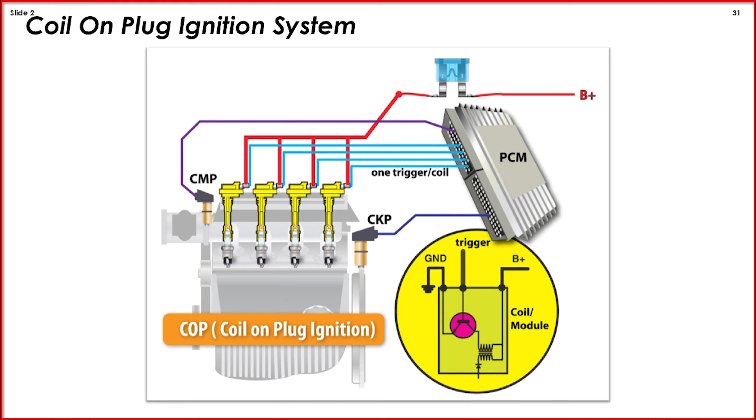So I've got some different ignition coils on the bench here, and I've actually got a few cutaway components here. I've got primary and secondary windings here. As we look at them on the screen, let's take a look at what's going on. The main components are the primary and secondary windings, which are wrapped around an iron core. Now the primary winding is much thicker than the secondary, but there's a lot less loops of wire here.

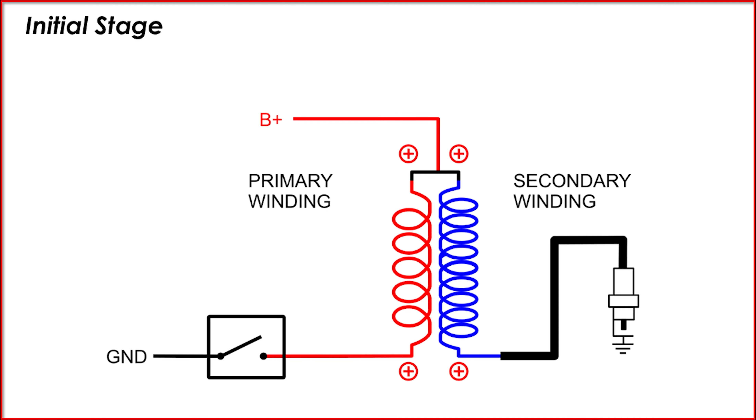So now a switched external circuit is used to supply current flow through this. We see on the lower left there, we've got our made up circuit here, and we've got that ground, and you can see right now it's not providing a path to ground. So once that is closed, now the primary is going to turn on, and we're going to see a magnetic field generated around the winding. As this magnetic field expands, a counter voltage will be created into the primary, and that's going to oppose the flow of the current.

This expanding magnetic field is also going to generate a voltage into the secondary winding. Because of all the additional loops here - if we look at my samples on the bench, we've got the primary, this heavier wire, and a much finer wire here on the secondary with significantly more windings - that's going to significantly amplify this here.

Right now, again, I ask you to pay special attention to the polarities here. In the primary, we've got positive on the top, negative on the bottom, and the secondary is opposite of that. So now the trigger, or the control portion, or the driver, is going to turn off, and now we create spark. You notice how those polarities have reversed themselves at this point. Now this magnetic field is collapsing upon itself, and it's sending all the current out to the spark plug to ionize or jump across the gap there. So that's when spark is created.

Now keep in mind, different conditions are going to require different types of spark demand. So when a vehicle's sitting in the bay, like the car is sitting here right now, imagine if it's idling - it's not going to take a whole lot of work here. We've got low in-cylinder pressures at that point, we've probably got a good air-fuel mixture now. Keep in mind, the fuel atoms are going to help jump the gap there, help that spark travel. It's going to create a path of connectivity there.

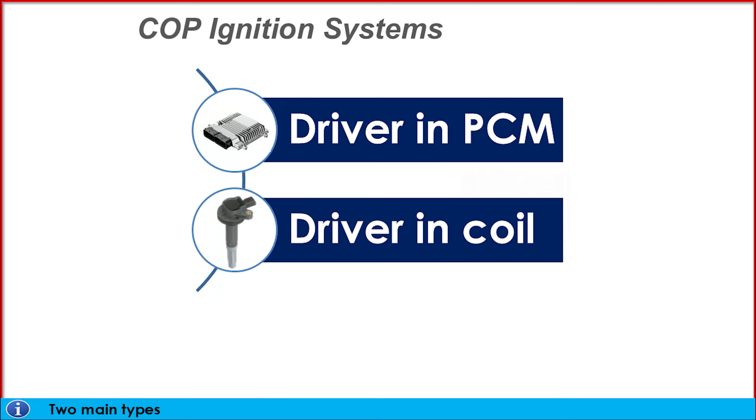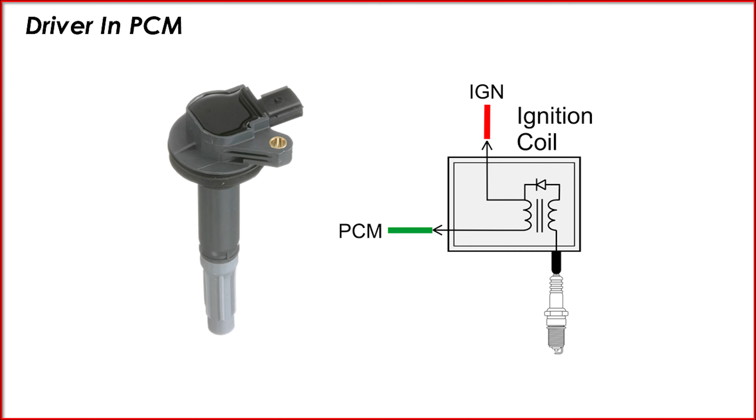So on probably one of the most popular selling ignition coils, let's say the Ford 2-wire ignition coil, even this Chrysler here, we've got a 2-wire ignition coil. And so you can see kind of the typical schematic shown on the screen here, where we've got B+ ignition power being fed to the primary side of the ignition coil. And then the PCM is going to command the ground side of it there. So that's where the actual driving of this circuit is going to occur. The switching, if you will, occurs inside the PCM. So we can see our primary circuit, and then we can see our secondary circuit connected directly to the spark plug itself.

So this is fine and dandy until either the driver goes bad or the coil shorts out. And in that case, the driver is going to go bad. So maybe you've run into this. I've personally run into this many times in the shop. I even run into it with my own kid's car, a Ford Fusion, where a faulty ignition coil took out the driver in the PCM.

And so that's one of these tips here is if you run into this situation, we don't want somebody to just go, oh, it's got a bad coil, put in a new coil. Well, if you got a faulty driver, great chance of damaging that new coil. So you always need to stop and verify the control signal before installing the new coil. A lot of people like to just, well, let me swap cylinders 2 and 3 around. Well, you may just kill that particular one as well. So always stop and verify that the signals are what they need to be.

Once you've come to the diagnostic conclusion, like in my scenario, we've got a faulty PCM now because of, what came first, the chicken or the egg? Is it the coil killed the driver in the PCM or the PCM killed the coil? Regardless, in that situation, in my world, it gets 6 new ignition coils and a new PCM.

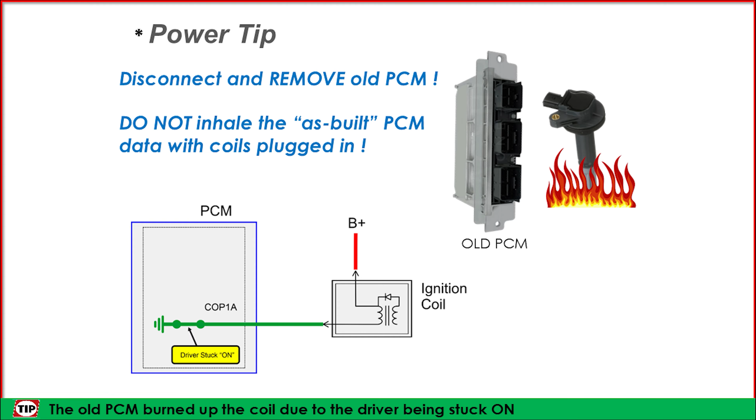And so that's where there's that little tip here as well. You want to make sure that you don't have coils plugged in when you're going to exhale and inhale the PCM information or that as-built information on a Ford when you're programming that new PCM. If you plug it in, the new PCM, and you still have the shorted coils installed on the vehicle, you're going to burn out that new PCM again. So either have your new coils installed or go ahead and unplug them all when you do this process here.

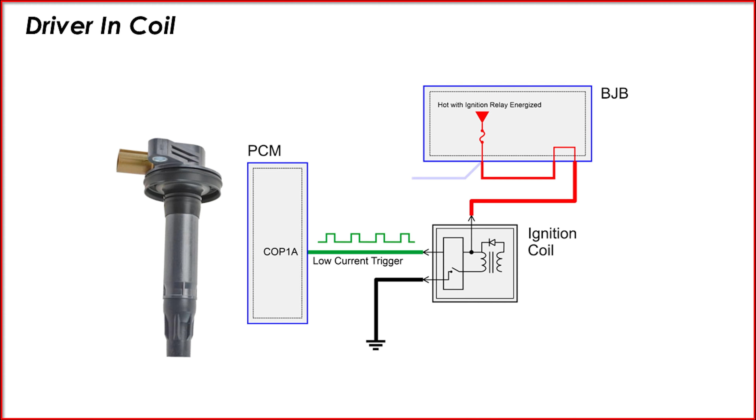Then you'll notice it's got a dedicated ground. That's going to be the 3rd wire there. But then the middle wire will be our trigger wire coming from the PCM. And so the PCM, unlike where it was on the other ones where it's actually physically making the connection there and providing the ground, this one is simply sending a square wave trigger signal there, telling, if you will, the ignition module inside of that coil to turn on and do the work. So if you think back to the old distributor days where we had an ignition module, or even DIS days where we had a separate ignition module, think about now that module being inside of each ignition coil here. And so we've just got a trigger signal coming to it from the PCM itself.

And then it's going to turn on and do the work there.

If you're working on a Toyota, that might be a little different, with a command and feedback signal. I don't want to say they're all 4-wire like this, but we always recommend doing your research and looking at a wiring schematic. But you should get a good understanding or appreciation for the differentiation between the two types.

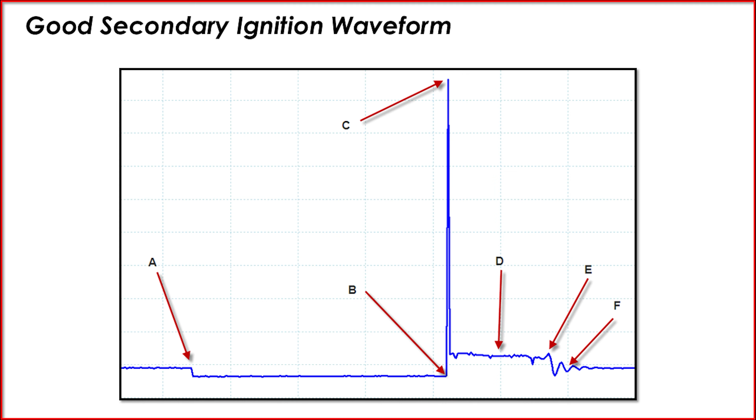Now when we get to point D, that's our spark line - this is what's happening inside the cylinder as it jumps from one electrode to the other. This is actually a pretty good one, tapering down a little bit as it's burning off the fuel mixture in there. We get a little tail at the end when it turns off at E, and then we can see the coil oscillations as it begins to recharge itself and prepare to happen all over again.

That was great in the days when we had accessible secondary ignition - we could clamp onto a spark plug wire right at the distributor cap. But with coil-on-plug we really don't have that same access. Or do we? Everything that happens in the secondary happens in the primary.

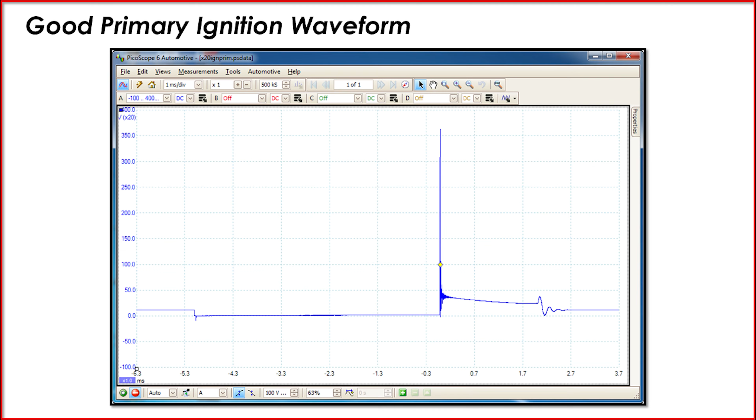In this example we're using a lab scope and back probing a coil-on-plug, looking at the primary side. You can see the exact same thing occurring as what we saw looking at the secondary previously - the primary gets turned on, gets turned off, you can see the peak voltage, and then the spark line in cylinder as it tapers down, burning off that air fuel mixture. It puts itself out, and we can see the coil oscillations as it starts the circuit all over again.

We can also look at current. Using our low amp current probe, we can put this over the primary feed to each individual coil. I'm going to show you a different trick I learned years ago to make a complete ignition system diagnosis more efficient, where we watch all of them here.

If we take a look at this, we can notice that when the coil primary is turned on, the current starts going up. We can see that nice smooth ramp, some oscillations at the beginning, and now it's going to build - going up to about 8.5 amps is what it's pulling there.

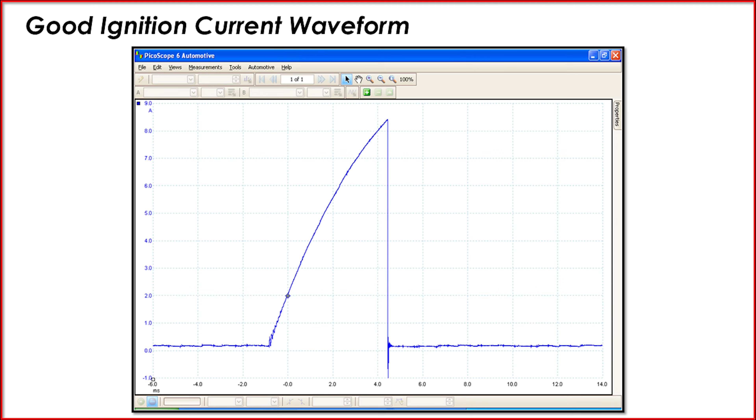And then it's going to have a nice clean turnoff, and you notice the tails or the oscillations there at that shutoff. So this is an example of a good ignition coil.

Now, if we've got a faulty ignition coil, take a look at this one here. That turn on, we don't really get that ramp. It goes vertical there, and that's usually due to some sort of an internal short or bypassing some of the primary windings there.

So we've got a problem with this particular ignition coil. And again, it's where it turns on there. And then we've got kind of the rest of the ramp looks pretty decent. Now, obviously this isn't drawing as much amperage as we had previously, so it's about 1 amp less here, or 2 amps less.

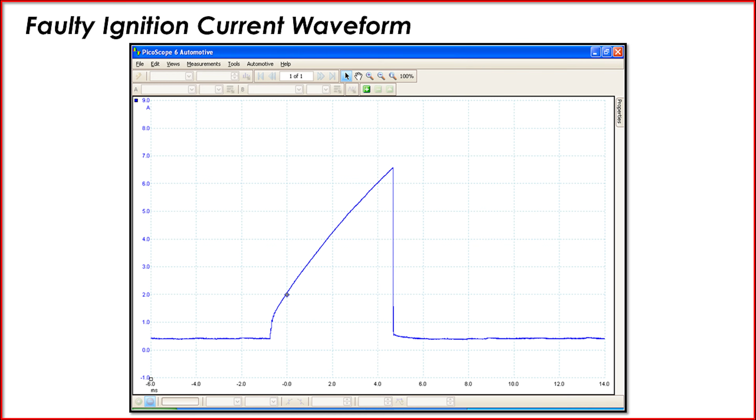And then notice the turnoff. It doesn't sharply turn off. It kind of tails off at the end there. So again, this is indicative of a faulty ignition coil current pattern. So hopefully after that little bit of review, let's actually go to the car here.

I'm going to fire it up. I've got the scan tool hooked up. We're going to see what's available on scan data on this particular vehicle, because some vehicles we do get a primary spark output data PID or a spark duration data PID.

We can get some information. I've got the information pulled up on this car. Let's take a look at this together. And then I've got the lab scope set up here behind me. So we're going to look at the primary circuit, and we're also going to look at the ignition current. I've also got a little paddle probe there, which some technicians really appreciate. I haven't spent a whole lot of time with it, but it's a tool nonetheless. So let's jump into this a minute.

All right, well, let's get the car started here a minute. Kind of reach in, get it fired up.

So we can take a look at, as I mentioned, there wasn't a ton of beneficial data. Obviously we're using engine speed for reference here. It shows us knock retard, shows what our base spark is here, and where our spark advance is. So I'm not getting a ton of diagnostic data out of this at the moment.

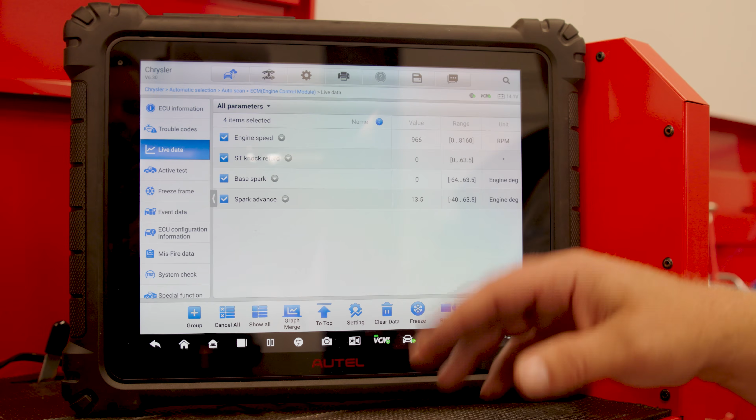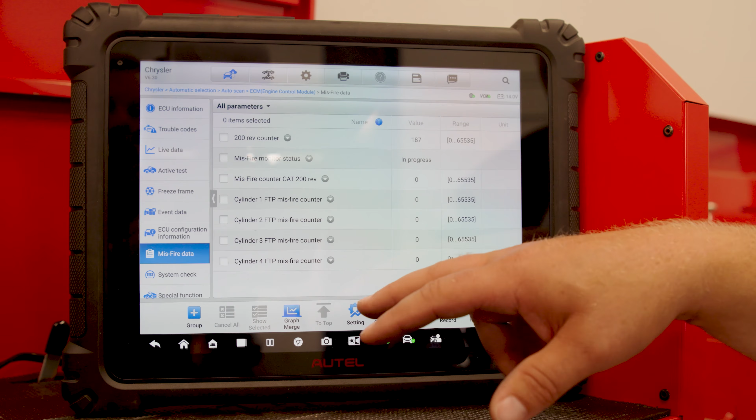And so, this isn't great, but like I said, it's worth looking at. I can click down here, pull up misfire data, and probably pull up some additional data PIDs here, but this is mostly related to the misfire itself. Doesn't give me a whole lot of specific ignition information at this point.

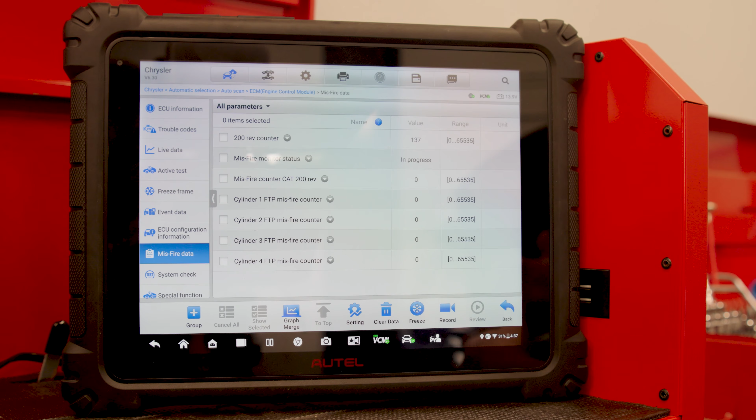So it's always worth looking at. You're going to be in the driver's seat, you'll have it plugged in. It's quick and easy. But let's go now under the hood and do a couple additional tests.

All right, so let's go turn around over to the car here. And let's do a little bit of actual physical testing here. So yes, I've gone ahead and loosened up the bolt in preparation for this. And I'm going to pull out number 1 coil here.

Yeah, so now we've got a misfire in the vehicle. We can hear spark occurring, but we've got good output from that coil. And so I feel like this is a good output coil.

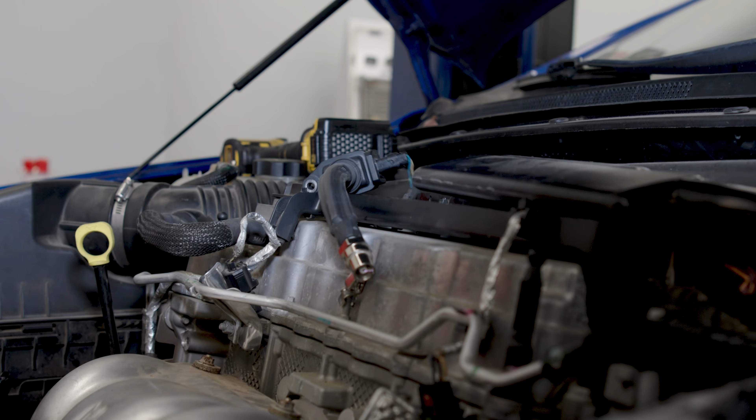All right, so you've seen the spark tester in action here. We feel like we've got a good performing, good output from this ignition coil. So now I'm going to put it back together. I'm going to slide it back in.

But before I do that, I'm going to take channel A of my lab scope, and I'm going to back probe the feed circuit here. So we're going to be scoping the primary. So let me reinstall this here, make sure I've got the bolt put in place properly. Okay, so I've got that in there, set that off to the side.

All right, Corey, we can go ahead and start the car, please.

So right now we can already see my ignition primary signal occurring here. And again, without zooming in too closely on it right now, we can see the primary turn on, we can see the peak voltage, we can see the in cylinder occurring here, and we can see the turn off oscillations. I can zoom in, I can look at it in significantly more detail there.

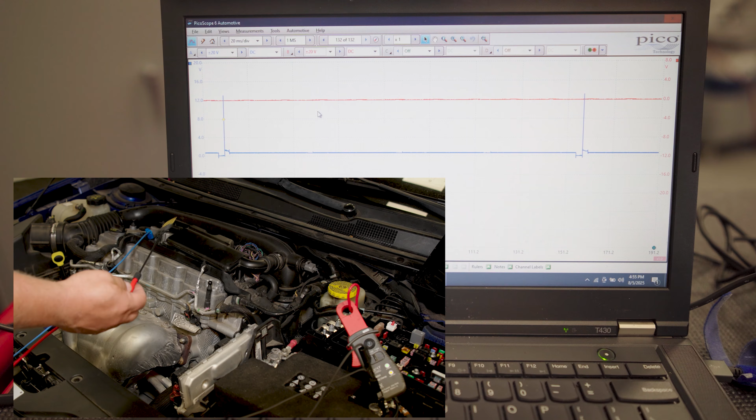But I've also got on channel B, the red channel here, this little paddle probe. And this is something a lot of technicians use. I don't have a ton of experience with it, but you can see right on here, it says this side to coil. So I'm simply going to lay it on top of the ignition coil. And so we can see on channel B that I've got something going on there. So let me turn off channel A.

So we're only looking at channel B. And we've got a signal. I move over to number 2 cylinder. I can sneak over to number 3. Some of these are difficult to get at, and that's kind of the beauty of this. I'm not going to be doing any analyzing off the signal. There's probably people way smarter than me that can do that. Right now, though, I kind of like it because it's telling me that there's some sort of a signal going on there, and it's somewhat beneficial.

I still prefer to actually see my ignition primary signal there. So I'm going to turn channel A back on as it was. Let me turn off channel B. Now I'm going to turn on channel C.

If we look over here, we can see that I've already done some research, and we recognize that all the ignition coils are fed off of fuse 15. So by removing that fuse and installing this jumper lead, now this one actually has a spot where I can install my fuse again. So I've got my 20 amp fuse in there, and now I'm monitoring the current with my current probe here. As we look at the pattern on the scope screen, we can see this being synced to number 1. I now know that this is number 1 current from that ignition coil.

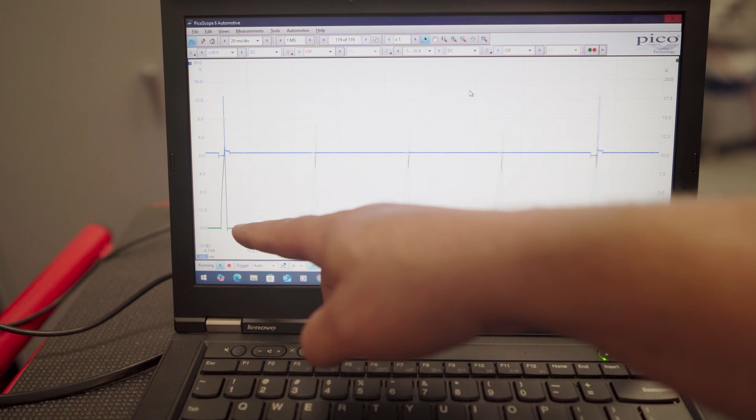Now if we apply the firing order and assume it's 1-3-4-2, we can identify each individual coil. I've really appreciated this on some older vehicles, like an old V10, where I didn't have good misfire information. By syncing to number 1 cylinder and applying the firing order, I've got enough time on my screen here - I'm at 20 milliseconds per division. We could zoom out, we could zoom in, but I've got one complete rotation, going through all 4 cylinders and repeating itself here again. Now I've got a good understanding of the complete ignition system, and I can move, if I suspect a coil, directly to that primary circuit.

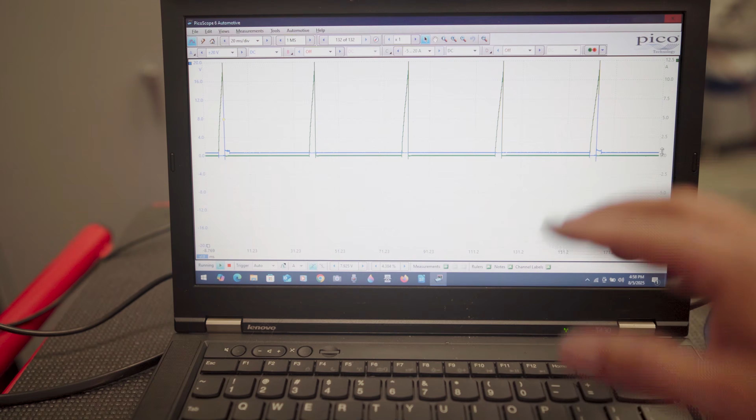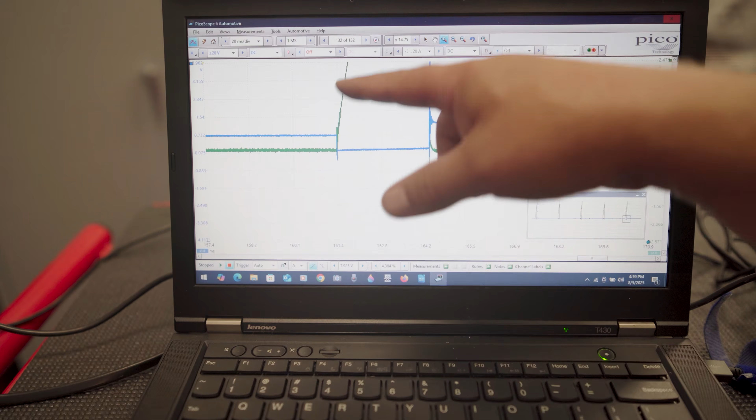So if we wanted to, we can even go further and slide this over, so you can kind of see how we can understand where some of that goes. If I want to just zoom in on this area right here, we can see - I'll pause it - how our primary is turned on the voltage side right there. So we've gone from B+, we're getting it pulled really close to ground right here, and it's being released. At that same time, we can see our current ramping up, and it's being released here. Again, that's what I think is so awesome - by observing the voltage, we can see the command signals, but we can also see the work occurring here. It's just very indicative of what's going on. As we're zoomed in here, I can see the firing line, what's happening inside the cylinder.

We've got great coil oscillation. I really feel good about the ignition system on this particular vehicle. So even if you're not a scope guy, hopefully this gives you a little more incentive to maybe think about one. I'm not trying to sell any lab scopes here, but hopefully now you have a new appreciation for just how much information we can get on this ignition system by utilizing a lab scope. Different tools, and again, the best tool is the one that's in your toolbox, but something to keep in mind.

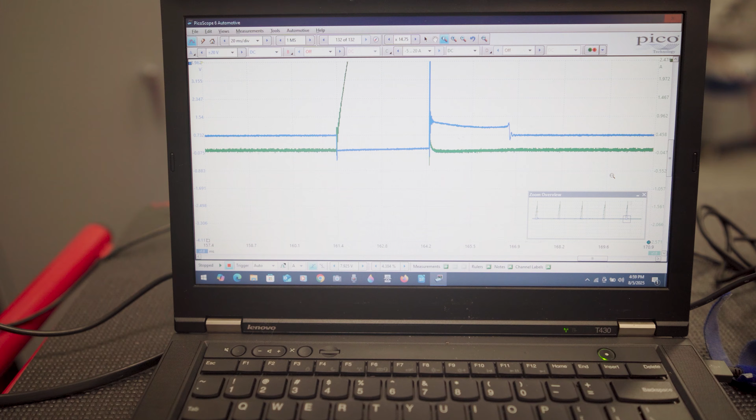All right, Corey, we can kill the vehicle, and let's wrap this up.

Okay, well, hopefully you can see how we can use the lab scope to really hone in on a lot of our diagnosis there. Again, we can use our spark tester like you saw - that tells us if we've got good spark or not. But if we don't have good spark, we need to understand what type of signal is coming to that ignition coil. There's not a whole lot of better ways than a lab scope. So if you're not into it yet, hopefully you have a new appreciation for it. If it's been a while, I encourage you to dust it off.

Spend some time this weekend. Hopefully it's not too hot in your shop. As you can tell, I'm breaking out a sweat here - that's a bad day in my world here. And so, hopefully you've learned a little bit more about this.

So Corey, I see a couple questions have come in. We may have answered a couple of them, but yeah, what are some of your favorites? We got actually quite a few here, Ryan.

So you went over quite a few different pieces of equipment there. The question that came through is, is there one piece of equipment or tester better than the other? Well, quite often the tester that you have in your box is the best one, right?

And so you can see I've shown the lab scope here. I'm using a Picoscope in this instance. I've got a Snap-on scope. I've got the little handheld one-channel scope that I got from AES Wave. There's a lot of different ways to analyze the signal there.